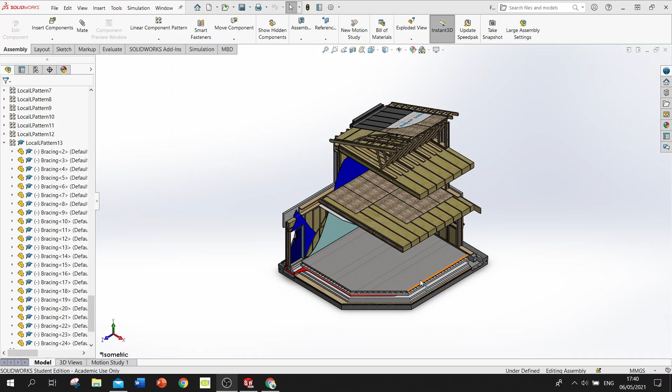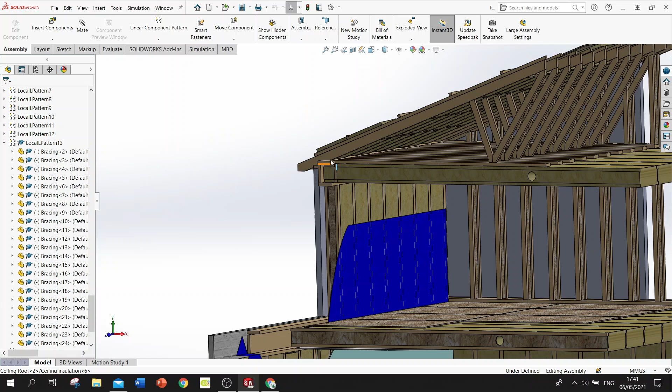Sean Reardon, and here's a recording of the SolidWorks model that I made. So this is a corner detail of the house. Just to be noted, this corner is the back right, so this is the back of the house, one of the windows. I deleted one of the levels, so it should be up three floors. We'll use those space up here, but it would have just been unnecessary because it shows the connection detail here between the ceiling and the roof. So I found it just to show better detail that I'll get rid of it.

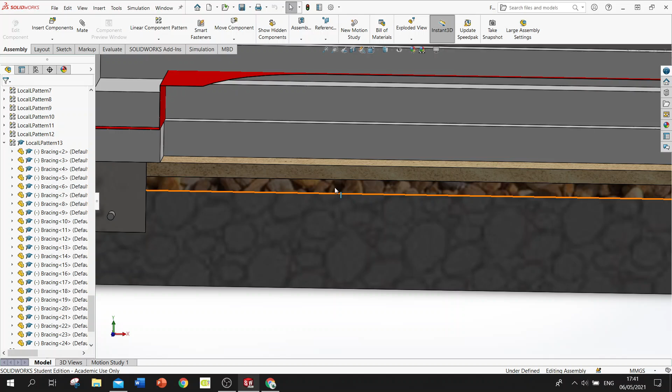Okay, so let's start at the bottom. I have my hardcore. There's an image of a hardcore from Trevor Hickey's book. I just embedded the image onto it, so it gives it a different effect. And I found an image of pea gravel and then sand blinding. So this is just sand, so it shows the two layers.

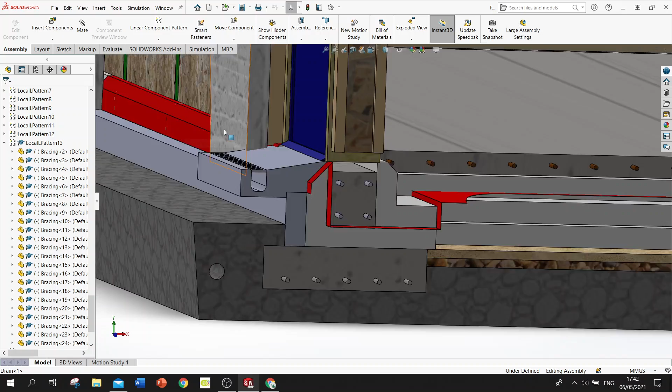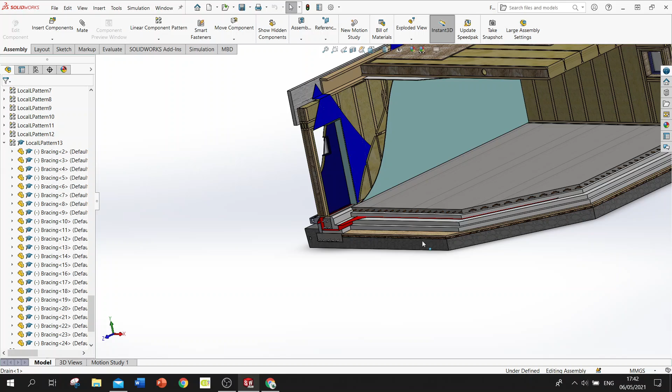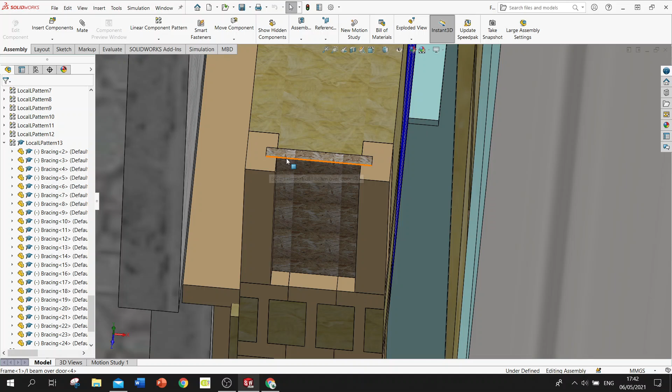So yeah, this is the EPS 300s and the EPS 100s, and your cast concrete floor with reinforced concrete or reinforced steel. This is the manufactured I-beam, so I created like two blocks. This is all made in one assembly, so it's easier to adjust, but I gave it the effect so that you can see the two end blocks and the center OSB. It's a 50 by 75, and it's at 500 centers, except over the door, because it's just to split the difference, but over here it's 500 centers throughout the house.

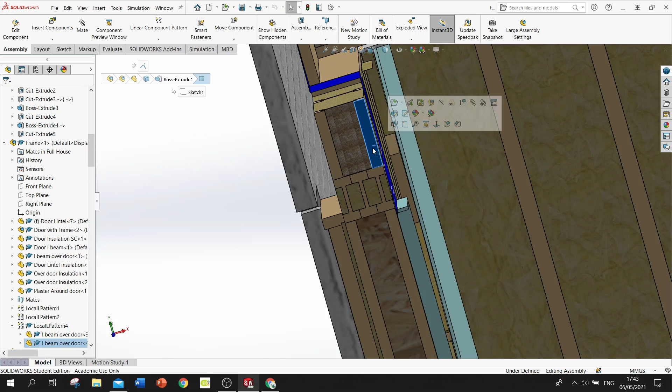Then I have my quilted insulation, and you see the lintel over the door. That's a manufactured I-beam lintel. So I'll just go normal to see better. So this is the timber lintel, the internal lintel, and there's a gap here for the external lintel. I just removed it so that you can see other things a bit better. You can see the cavity closer going around, and the door with the insulation and the window going through it.

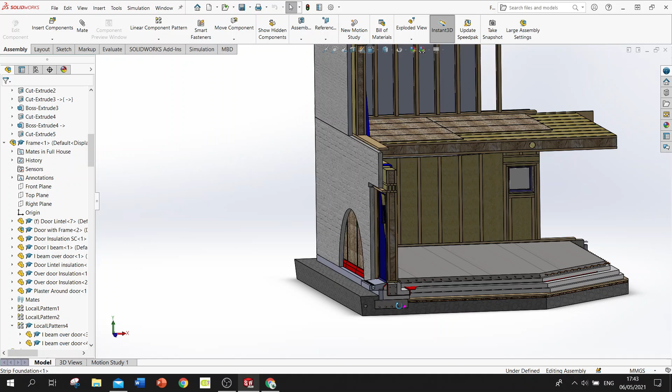And this is the drain going out the front door, so it wraps over the EPS 300 for the door, so it's a different style. It cuts out at 45 later, rather than having a step and a flat. It just goes straight down at 45, and this goes with it.

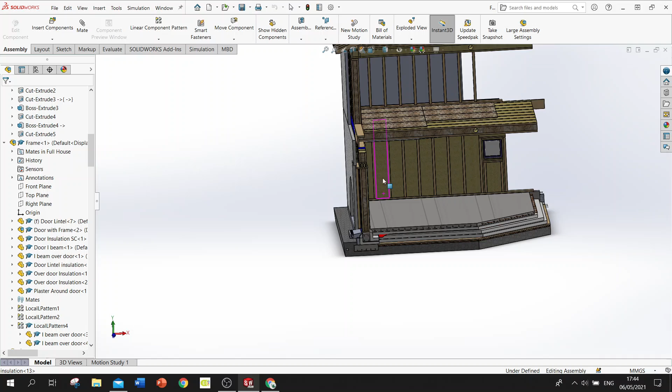So I'll go over to the air tightness. So this blue layer here is the air tightness layer. So I cut it like this, goes up and down, just to show it wrapping around over here and wrapping around under the door. So it kind of glitches a bit, but you can see that the air tightness layer wraps down there, and it's taped on.

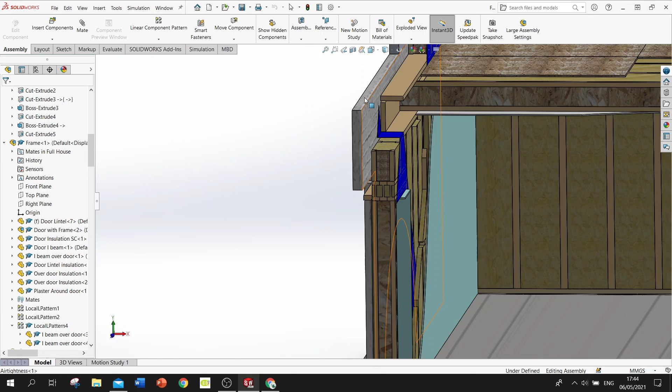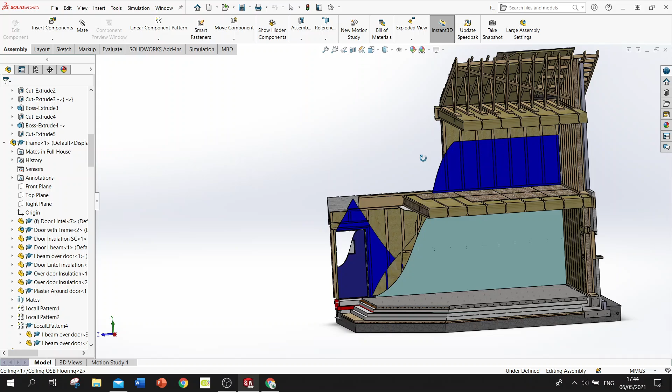And if you look over here, you can see that it goes over the head plate of the bottom floor and outside the end plate of the ceiling. And it goes under then again and wraps up to the next floor, and then it continues and does the same and goes up through the roof. I just decided to remove it there so that I can strip back more and show more detail up in this section. So this is my service cavity detail.

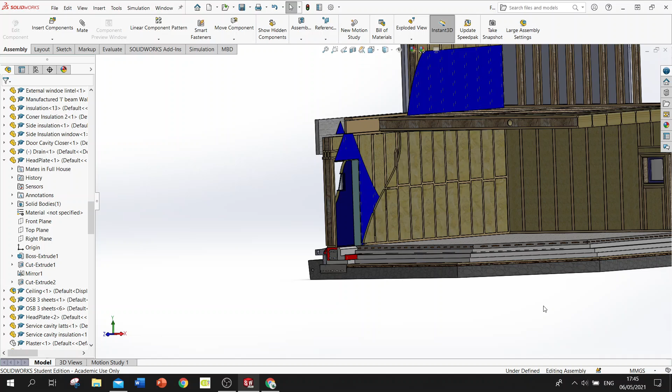I have insulation running along behind this, so if I hide the component, you can see the insulation and the service cavity with the alternate battens going through, and it would be running along this wall as well, but I just removed it so I can see more detail with the rest of the house.

So I'll put that back and go up. You can see the insulation and the I-beams, and here's just the I-beams without the insulation, so you can see the spacing and its relation to the sole plate of that floor. And the OSB as the base flooring—you'd put your flooring on top of that.

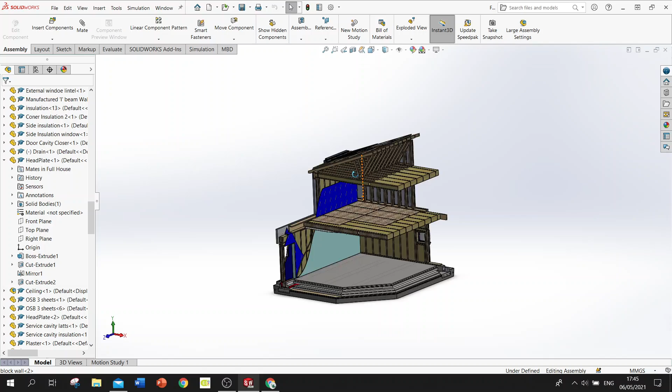Now we go to the roof. This is at a 20 degree pitch. Let's go normal to the 20-degree pitch with my monopitch roof. I decided to do this corner because it shows the eaves, rather than having the roof go down this way with the eaves kind of floating over. I decided it'll look better to have the eaves on the side of the wall.

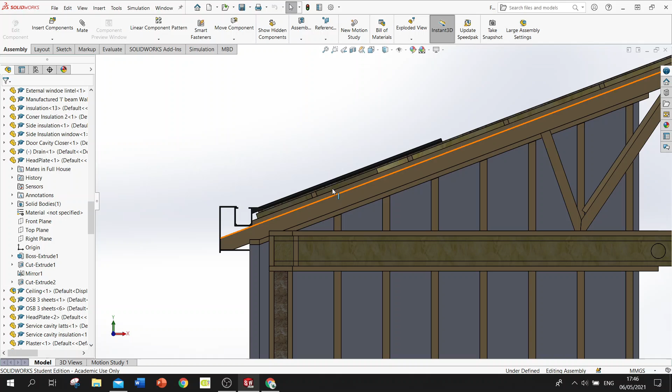So this is a zinc roof with integrated drainage, so it's not overhanging on the fascia on the side. It's kind of more sleek, so you don't see it from the outside or from down below. You'll only see it if you look from above.

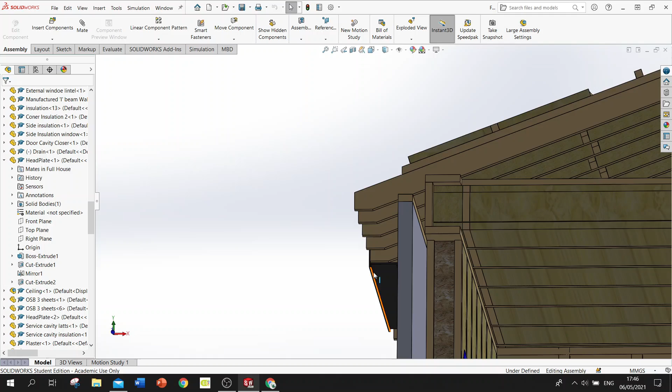So it wraps around with your fascia and flashing, and you have your soffit underneath that's vented. It needs to be vented because timber can rot if it's not vented. That's why I have cross battens.

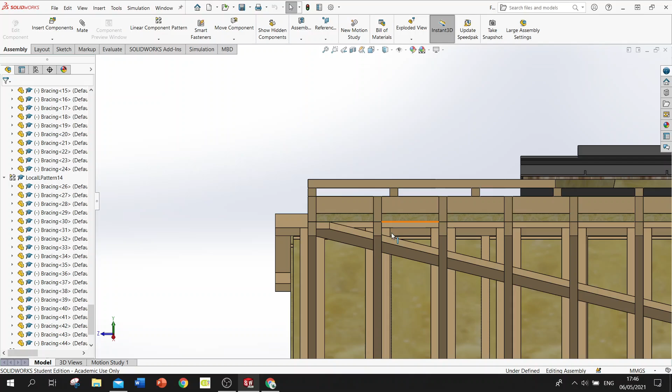So you have your venting batten here. I put it running down so the air can flow through it, and I have my cross battens that are insulated, adding an extra layer of insulation. So it's a hot roof rather than a cold roof—it has less thermal bridging.

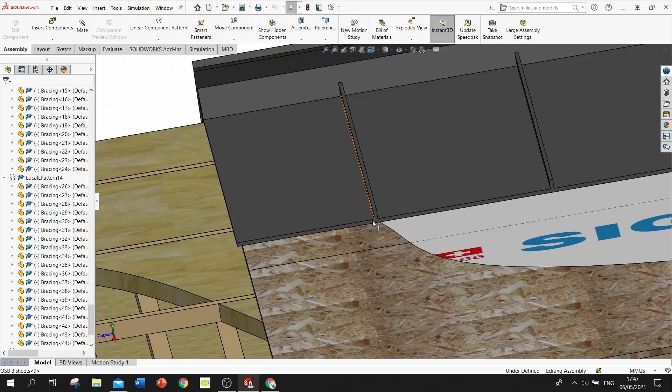And then you have your OSB on top and your roof felt. I just put a logo on it, and then it's your zinc sheeting. It would have been kind of a waste to see the wrapping around, but on the male side you'd have a hook, and on the female side you just have a flat, so you hook the male over the female connection and bend it to close it off. The end result will look roughly like this—just a bump, flat, and a bump, continuing on.

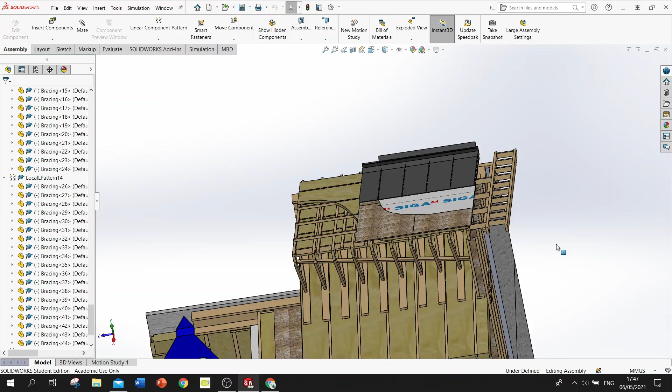I put this over here because on an overhang of a roof you can't do the same thing as on this side, since you have no supporting wall here. You have to have these battens going across, extended from your last two rafters, so that it's supported enough, and it has an overhang because of shading.

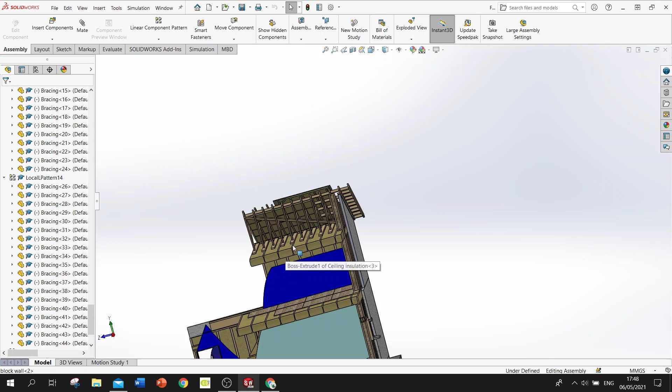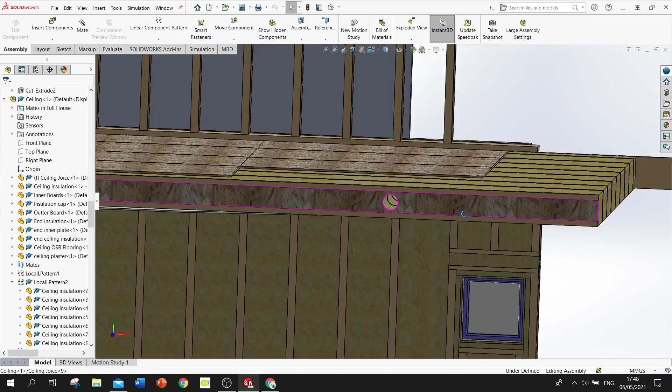You can go here and see the ceiling. These are 50 by 50s because that's just the ceiling standard that was recommended—I did a bit of research. Same OSB webbing with the hole running through the insulation as well, for pipe ducting for the MVHR or lights or whatever you need.

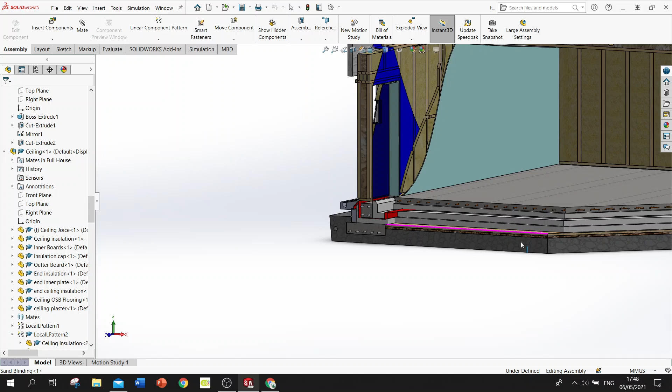The window detail is similar enough to the door detail with the lintel—it's just more insulated because it's easier to insulate under the frame a bit better. But there should be insulation underneath the door too, as threshold insulation, but it keeps glitching out every time I do it.

And you can have the cavity closer and the window—that's quad glazed, the standard I picked. It was from Canada, and it gave me very good U values.

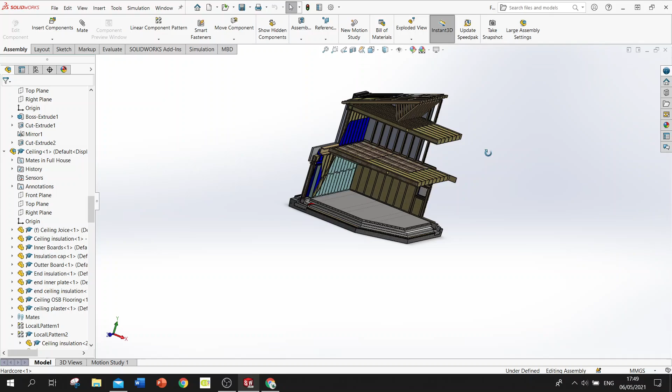So that's the detail. For the roof, I have a reinforced cross batten here to help with flex, running this way and on the base as well.

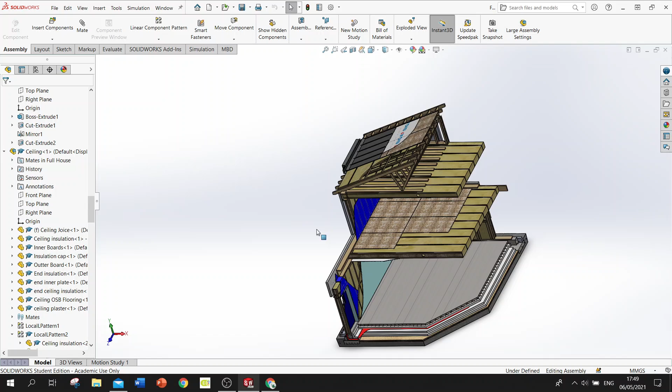Hope this is good enough. Let's analyze it—give it a bit of a rotation. Thanks.